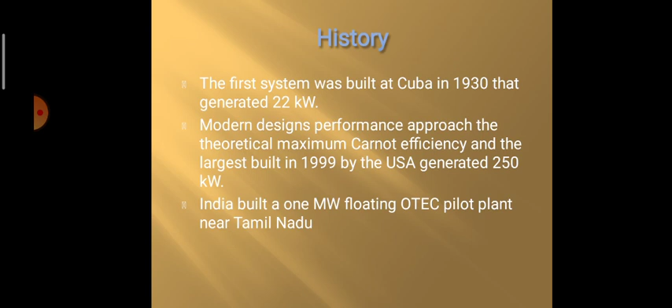India also built 1 megawatt floating ocean thermal energy conversion pilot plant near Tamil Nadu, and it is being financed by Government of India. The conversion of solar energy stored as heat in the ocean into electrical energy is called as ocean thermal energy conversion. The capacity factor of ocean thermal energy conversion plant will be around 90%. The losses due to pumping will be up to 20%.

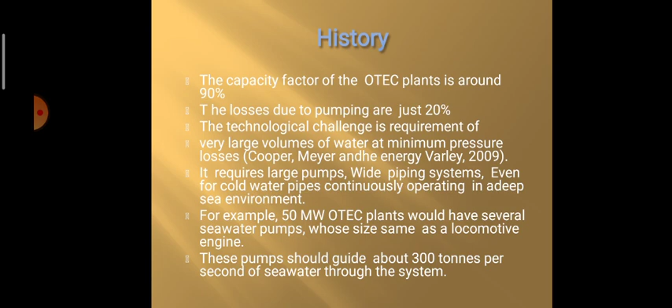The technical challenge is requirement of high volumes of water at minimum pressure losses as per the research paper published by Cooper, Meyer and Varley in 2009. It also requires large pumps, wide piping systems, even for cold water pipes continuously operating in a deep sea environment, which is a very big challenge as there are many species living in the depth of the seas. For example, if we want to generate 50 megawatt electricity from an ocean thermal energy conversion plant, it would require several seawater pumps whose size is same as a locomotive engine.

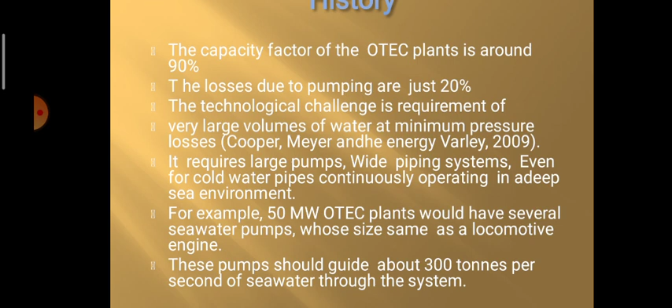These pumps must be able to guide 300 tons of seawater through the plant per second, which is a very high value compared to any other conversion systems.

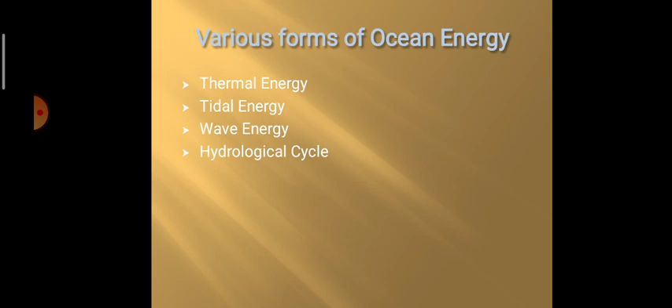And apart from this, ocean energy can be used to generate not only electricity but also to desalinate water, support deep water mariculture, provide refrigeration and air conditioning. It can also aid in crop growth, mineral extraction. OTEC has also been used to produce methanol, ammonia, hydrogen and other such chemicals from the ocean.

The principle behind ocean thermal energy conversion is Beer-Lambert's law. Beer-Lambert's law states that each layer of equal thickness absorbs same fraction of light that passes through it, which is given by -dI/dx = kI. On integration, we get Ix = I0 e^(-kx). Here I0 represents intensity of radiation on the surface, Ix represents intensity of radiation at a distance x, and k represents absorption coefficient.

This absorption coefficient will have a value of 0.05 per meter for fresh water, 0.27 for turbid fresh water, and 0.5 per meter for salty water. From Lambert's law, we could understand that radiation intensity decreases exponentially as we move into the depth of the layers of the seawater. Depending upon k, most of the absorption takes place very close to the surface water. That is, maximum temperature is only on the top surface of the water, whereas in the depth of the ocean, water remains cool.

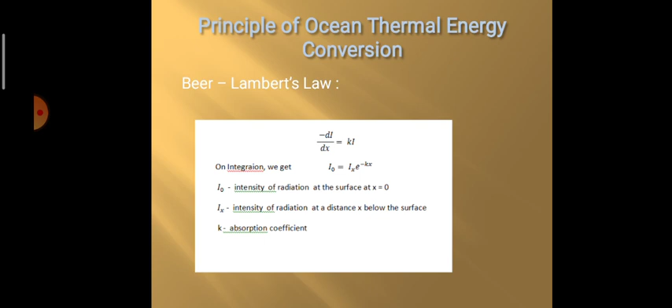The working principle behind ocean thermal energy conversion is a process which harnesses the energy from temperature differences between surface water and deep ocean waters. Energy from the sun heats the surface water, and the thermal energy conversion system uses this temperature difference to power a turbine, thus producing electricity. Warm surface water is pumped through an evaporator. The vaporized fluid drives the generator. This vaporized fluid is turned back to a liquid in the condenser, where it is cooled with cold ocean water. This cold ocean water is pumped from deeper oceans onto the condenser.

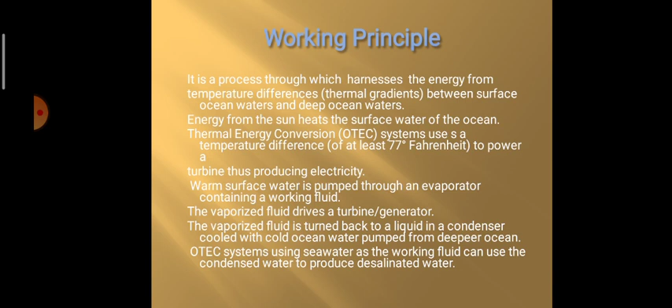Ocean thermal energy conversion system using seawater as a working fluid can use the condensed water to produce desalinated water too. The figure shows the thermal energy conversion system where we can clearly see the connection between evaporator, turbine, generator, condenser and pipes that are flowing from the system into the depths of the ocean. It is similar to a heat engine working between two different temperatures.

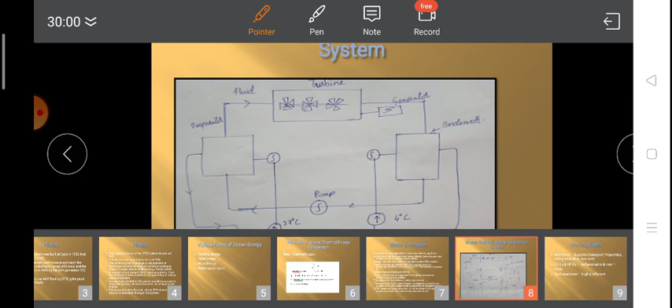The warm water on the surface is around 28 degrees Celsius, where this warm water is allowed to flow from the surface to the evaporator through a pump. The evaporator increases the temperature of working fluid, which turns it into vapor form. This vapor now reaches the turbine, which rotates the turbine while it is passing through the chamber. In this way, this rotation of turbine will result in generation of electricity.

After passing out of the turbine chamber, the vapor is allowed to flow into the condenser, where the condenser is surrounded by cold water which is pumped from the depth of the ocean.

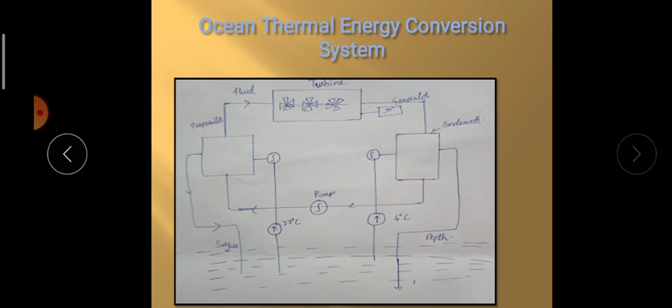The maximum efficiency of an ocean thermal energy conversion plant can be understood from Carnot's heat engine efficiency formula, where Carnot's heat engine efficiency is given by eta is equal to 1 minus T2 by T1. That can also be written as T1 minus T2 by T1.

Whereas the actual efficiency of an OTEC plant is given by eta OTEC is equal to EF into efficiency of Carnot engine, where T1 is the temperature of surface water, T2 is the temperature of deep sea water, and EF is the relative efficiency factor, which is usually 0.4 to 0.6.

Working fluid. The working fluid plays the main role in the OTEC system. Here we have three types of working fluids available for the functioning of an ocean thermal energy conversion system. If we consider the case of ammonia, ammonia has very good transport properties. It is easily available and it is of low cost, but the problem is it is toxic and flammable.

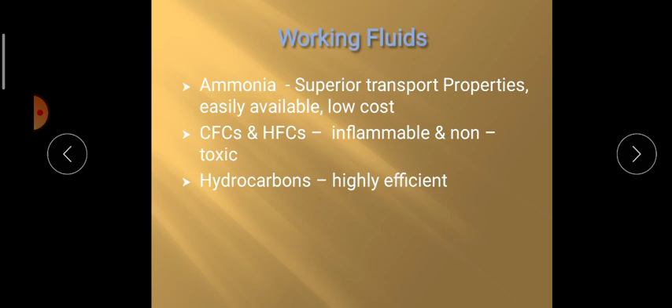However, the establishment of the design itself is a costly affair, and thus there are no private agencies interested in these conversion systems.

The merits of OTEC can be discussed in this way. Ocean thermal energy conversion is a clean and renewable source with minimum or sometimes no carbon emissions, because it uses warm surface seawater and cold deep seawater to produce electricity.

If OTEC is designed in such a way that we can also reduce other polluting chemicals with good care, ocean thermal energy conversion systems not only produce electricity but also produce fresh water at the same time, which is a very good advantage in areas where fresh water is a very big challenge. A 1 megawatt OTEC unit is able to produce 4,500 cubic meters of fresh water per day, which is more than sufficient for the requirement of 20,000 people.

Apart from this, the OTEC system can also give us nutrient rich cold water from the deep ocean as a byproduct. The cold wastewater can be discharged into large ponds near the shores and used for mariculture, producing good yields of a variety of fishes and shrimps.

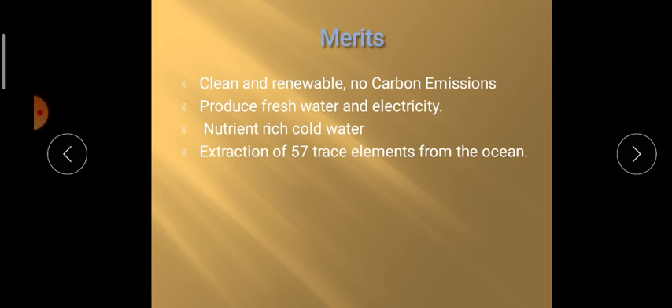The amount of energy that can be harnessed is more than enough for the human needs of today's world. The use of OTEC for the production of electricity will also give us an alternative to fossil fuels. However, there are certain demerits in the usage of OTEC. The cost of the power plant itself is very high, which is a big drawback in using the OTEC system.

Construction of plants in deep oceans is also a difficult process compared to any other plant. Due to this, no energy company is interested in the establishment of OTEC plants. Apart from this, corrosion of metal parts of the plants is a very big challenge which has to be taken into consideration. Of all these, there is going to be huge damage to the reefs and marine ecosystem in the depth of the ocean where the plant is to be established.

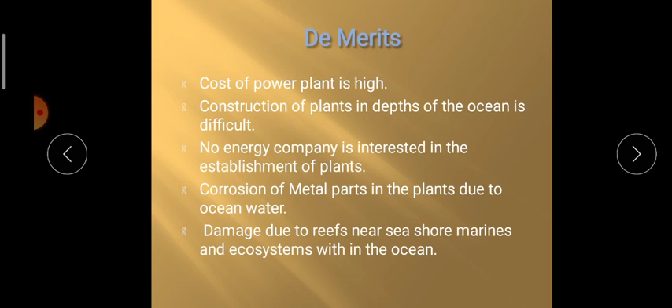Saline water can also cause corrosion to the parts of the power plant. However, scientists are trying hard for better options instead of metal machinery, and there is also a lot of research on establishing OTECs near seashores where marine species and ecosystems are very few in species and number.

OTEC power plants can be classified into 4 categories based on their working system: open cycle system, closed cycle system, hybrid cycle, and Kalina cycle, which we will be discussing further in our next video.